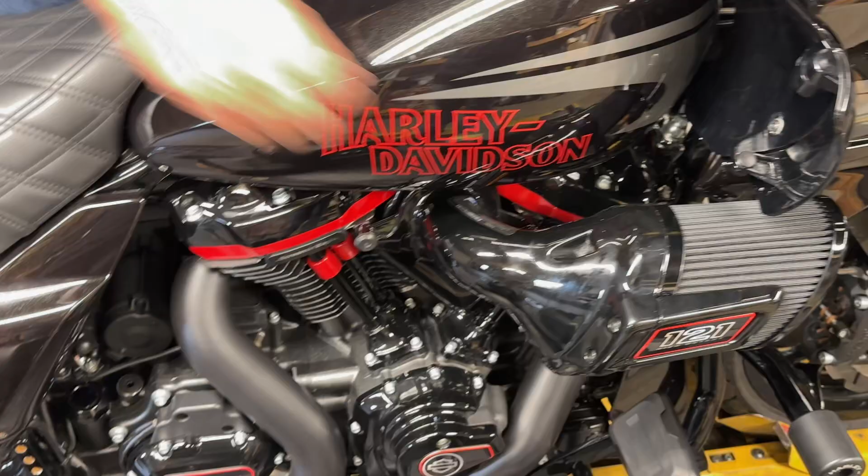It's a completely stock engine, has a heavy breather that it came factory with, and a Khromewerks 2-to-2 system with a louvered baffle. We showed you the results when we went from the stock calibration to the Harley-Davidson Screamin' Eagle tuner, and now we put the Impact ECM on there, and we're going to show you what happened. Come on over here.

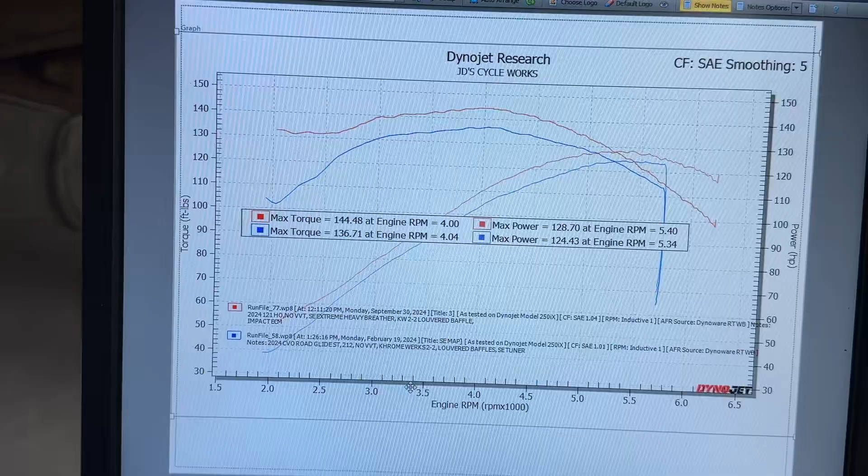This bike originally started off with the Screamin' Eagle tuner at 136 foot-pounds of torque and 124 horsepower. Now it's up to 144.4 foot-pounds of torque, and the horsepower is at 128.7.

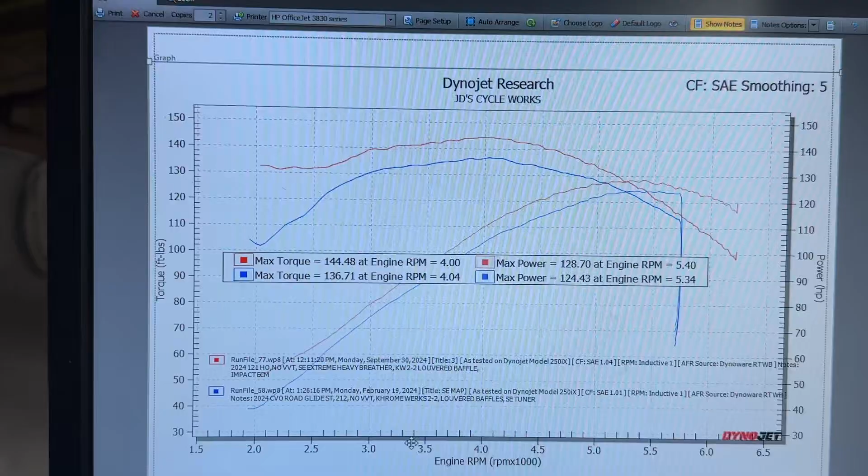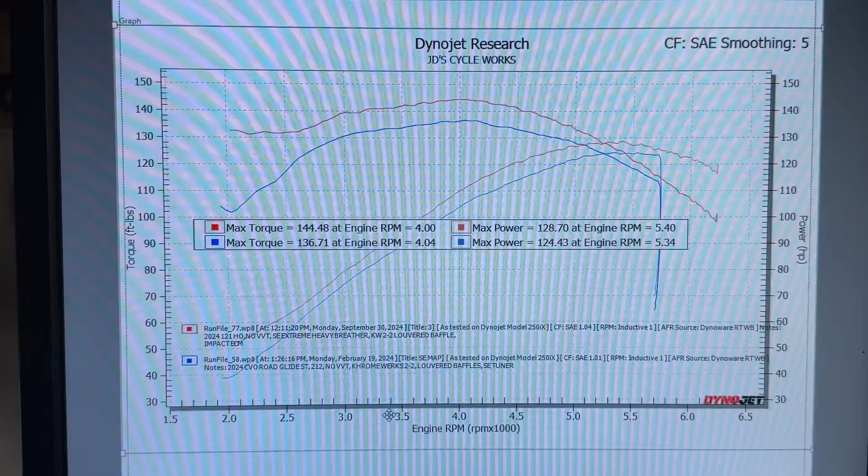Check this out here at 2,000 RPMs - it went from about just over 100 foot-pounds of torque up to over 130. This is a tremendous gain over the Harley-Davidson tuning system, and this man's really going to feel the difference on this bike and how it reacts. So one more thing, just with the Impact ECM that we're working with.

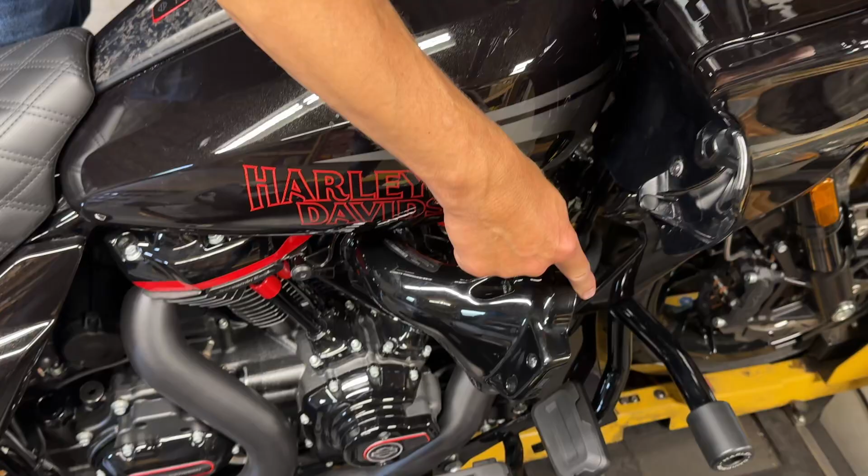I was curious, so I wanted to see how it worked without the air filter on there, and I also tested it without the whole assembly on. These results are kind of surprising, because on the older M8s, this assembly with the short filter robs a lot of power.

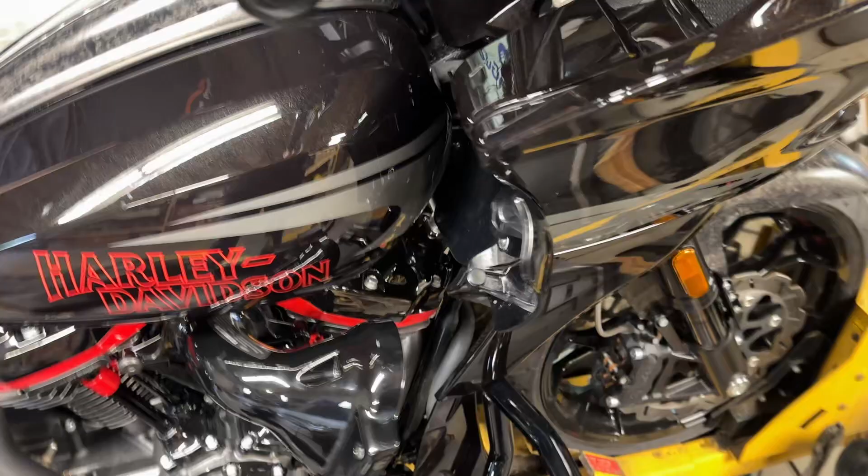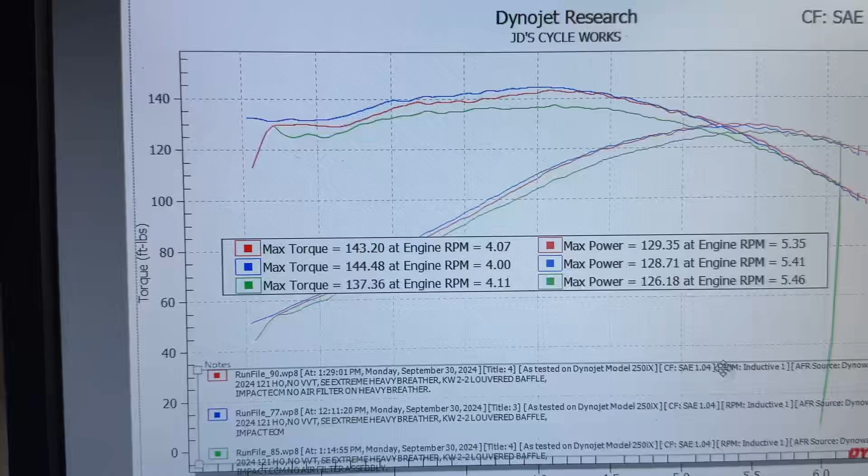But in this instance, you can see our best torque is with the air filter element on at 144.48. With the filter element off and the snorkel on the throttle body, we still got 143.2 torque, but our horsepower went up - not even a full horsepower difference. Now with the whole assembly off the bike, which I know is wrong, it really dropped power.

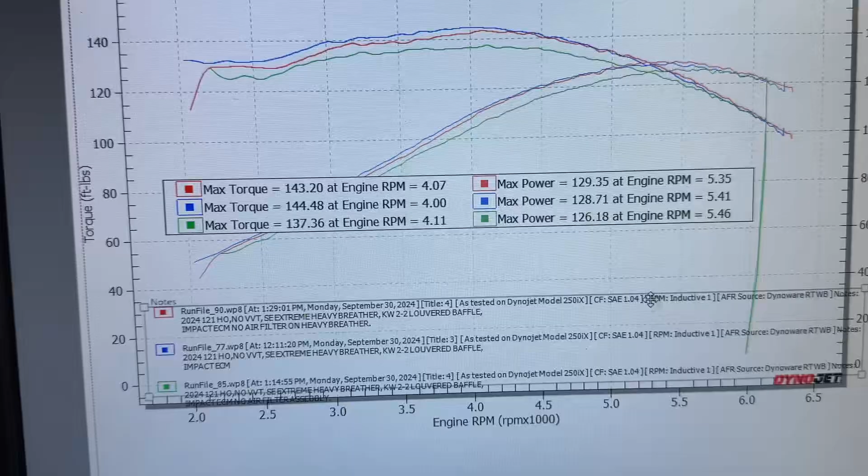So I guess what we're learning here is that in this engine, in its stock form as it comes from Harley, the high output - leave the filter element alone. That thing's working good. They must have really spent some time engineering this with the airflows to make this stuff work. This is pretty cool.

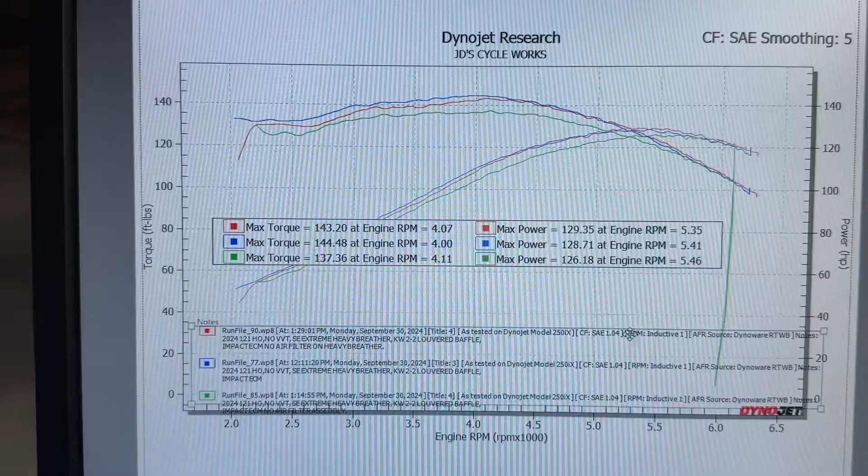So there's a little more data on this bike here, and I will put the air filter element back on there and continue to get this bike ready to go.